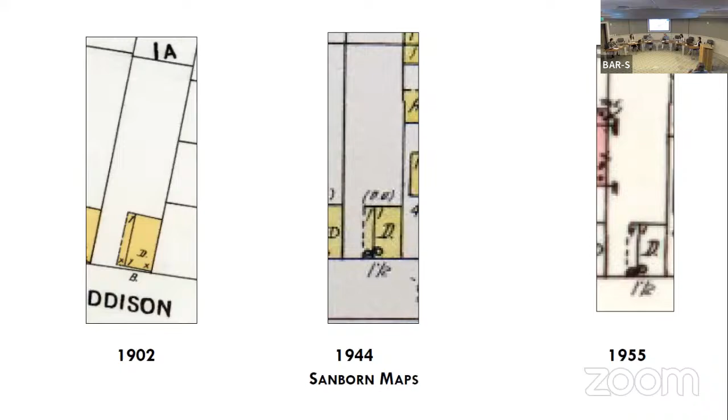They're requesting complete demolition of the existing structure. This is the property's location on Addison. Some existing site photos, and some context of Addison. And then we have the Sanborn map showing the history of the property. And I will turn it over to the applicant.

Thank you, Frankie. John Sullivan, SR Studio, representing the owner. I guess we all met out there this morning. I think this is a tough one. I don't like taking down buildings, but there's not much left there.

As the application said, it actually previously got a full demo permit in 2011 for the building, and there was a 1-story addition on 2 sides that pretty much fell down. It's been taken down since then. So the siding on those 2 sides are gone. The porch is gone, there's no historic roof. Our windows, the roof is shingles.

It's also hampered that there's a grand tree just a couple of feet off the property to the right side. So, I don't know, to save it, there's really not much for saving. There's no foundation—I think you can see there's stones and just seam blocks sitting on the ground that's holding this thing up.

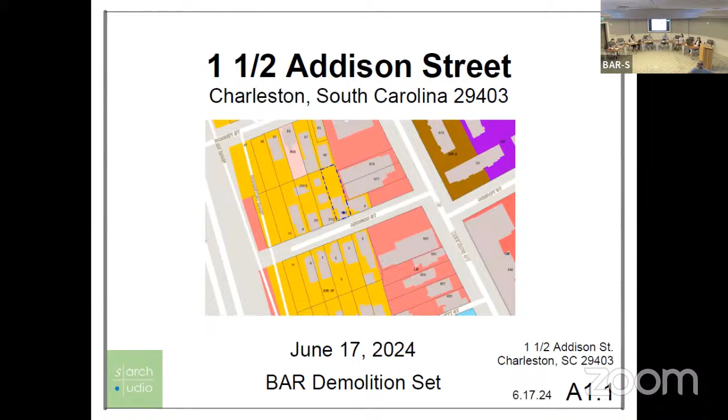Okay, that's observation. Current owner purchased in 2023 per tax records. There is a lack of permit activity on file for this property, which indicates maintenance has not been performed in over a decade. Essentially, we feel like this is a case of demolition by neglect, though as stated by the tax records, not by the current owner.

The structure previously received a demo permit in 2011. The staff have been unable to determine what sort of review was done at that time. While the structure has lost some of its original features, the essential form still exists, as well as much of the original elements underneath the vinyl siding. This is a significant Charleston building type and should be restored and repaired. So we are recommending denial.

Thank you, Frankie. Mr. Sullivan, did you want to respond to or clarify anything raised in the public comment or city staff comment? I'll respond quickly, as I said. I mean, I agree, it's a shame that the building is in this shape.

What I disagree with is, yes, it's a great form, and I would hope to retain the form, but that's not what this purview is for, it's for historic materials. There's no foundation, most of the studs are gone or spliced together and have to be repaired. It's sided on two sides, we could save the siding. But it's a zero lot line property and trying to put anything back there is bad, not to mention the tree right there.

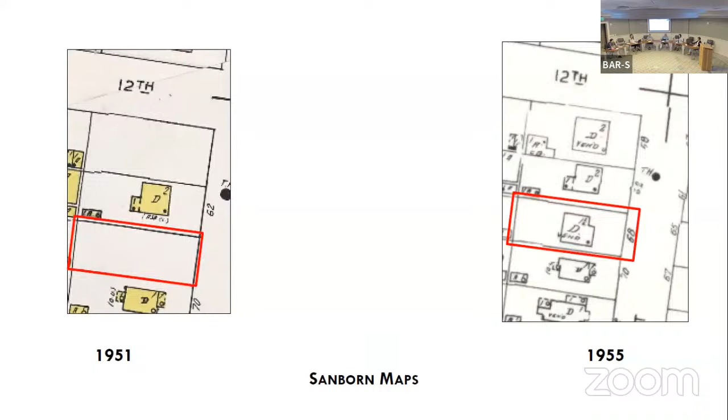And Sanborn maps showing the history of the structure. And we will turn it over to the applicant.

Hello, I'm Barbara Looney. I'm the architect of record for this application. We are requesting a removal. Can we move to the next slide?

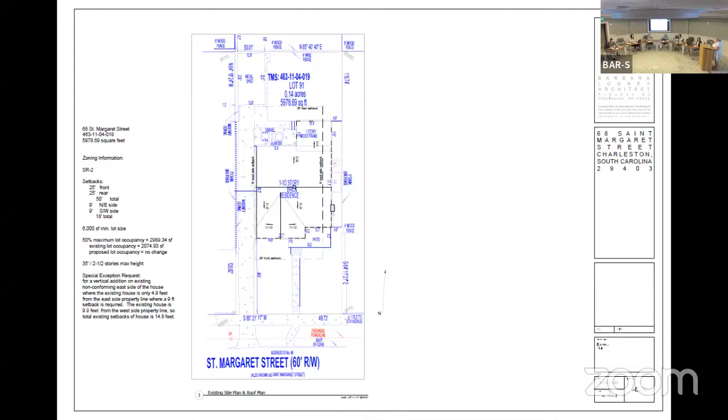If you're looking at that roof plan, that back roof, we're requesting a removal of that. You can see there's a one-story addition off the back that's non-historic. That roof would be removed as well.

But I want to point out that if you go to the next slide, on the demo plan, you can see the grayed out portion is what we're asking for the removal of. But note that we're keeping the white band around the sides of that. We're keeping the rake at either side on the gable, the original gable, and we're keeping the eave at the back.

Also the existing ridge will remain as the high point of the mass of the house. So from the front, from St. Margaret Street, the volume does not change other than you're gonna see a little bit added at the shed, but the original form will still be visible and distinguishable. So on to the next one.

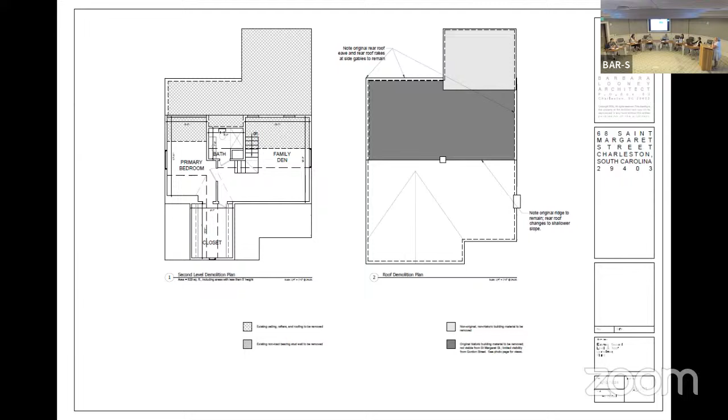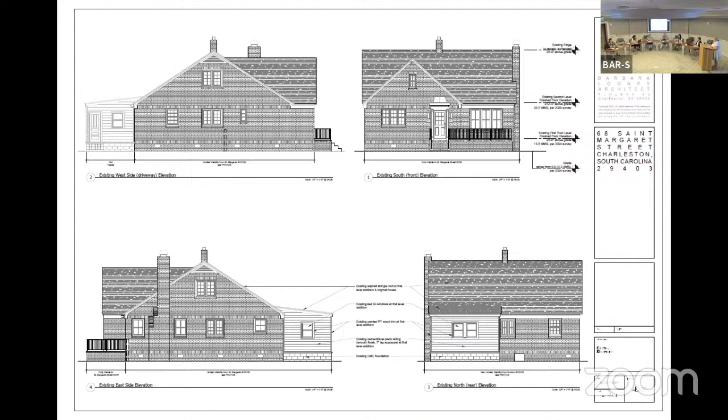There is some visibility of that asphalt shingle roof between the houses that back up to it on Gordon Street, looking down their driveways. You can see portions of the asphalt shingle roof on either side. Let's go on to the next slide, and to the next one.

That's all I had. Any questions for the applicant? Thank you. Do we have anyone speaking from the public? All right, Frankie, if you give us city staff comments and recommendations, please.

Staff observations: the rake at the side gable is being retained, and the proposed demolition is only minimally visible from Gordon Street. Staff recommendation is approval. Thank you, Frankie.

Ms. Looney, did you want to respond to or clarify anything? All right. Public comment on the applicant's presentation is now closed. We'll move into board discussion and a vote.

Just again, if an applicant wants to share what's proposed, they're not allowed to anymore, is that correct? That is correct. The applicant's proposal was reviewed and approved by BZA, so there are documents available that they are required to follow. So in that case, I believe you could have looked at those documents for the applicant to talk about. We could access them.

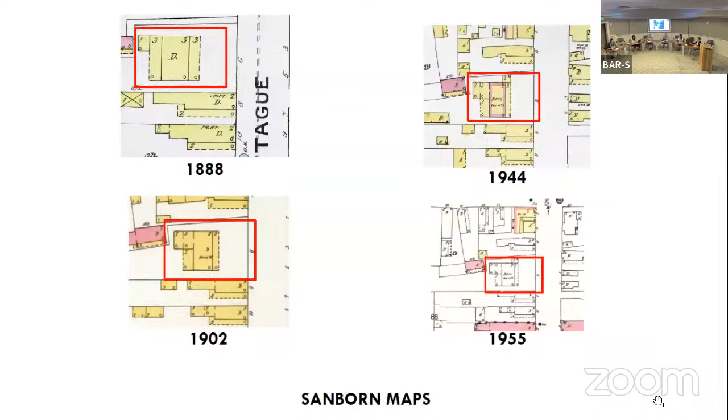This is the property's location on Montague. Existing site. That's some context of Montague, and more maps showing the history of the property, and some photos from the BAR inspection. And I will turn it over to the applicant.

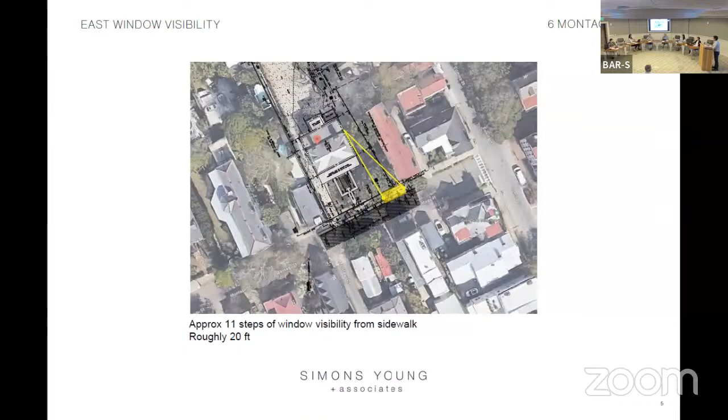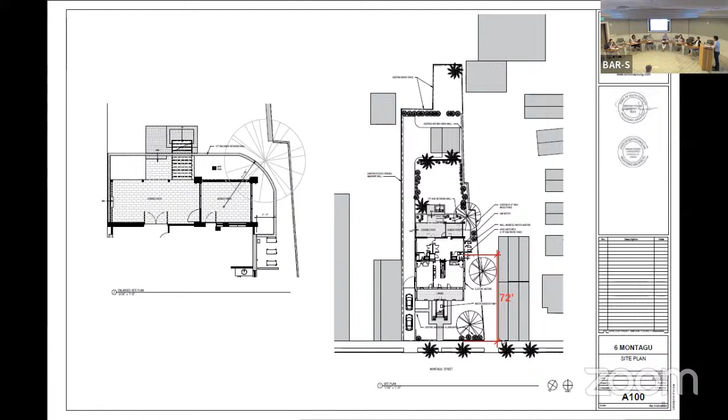We had a kitchen designer. This was part of the interior design show house for the Charleston Symphony Orchestra, and it raised over $100,000 for them, which was great. Every designer gets a room. The kitchen designer came in and altered the kitchen a bit from what we have, and the range moved over, so the operable window was no longer a good place for it.

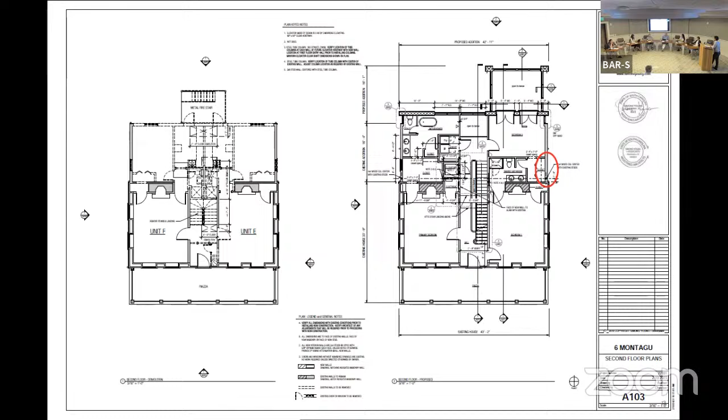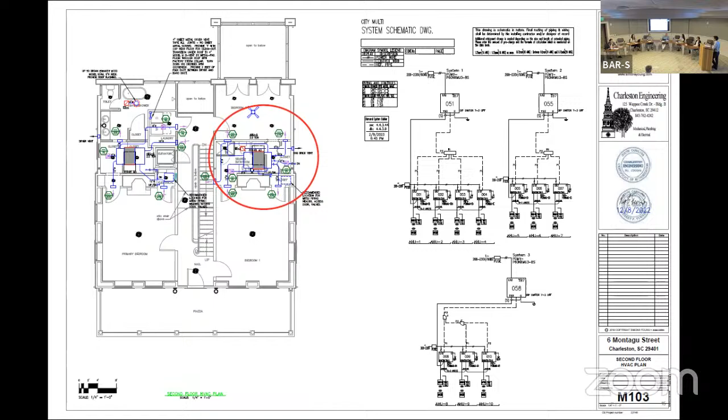And then this is the mechanical equipment that's squeezed into that little section. We hired a mechanical engineer because we were trying to do a lot in a little space and keep it happy in 100-degree weather, which we accomplished. Next slide, please. And then these are the hot water heaters, which are in the same location they used to be in. There are now 3 instead of the 6 that were there.

Is there one more slide? So that's the building that sat on the market for a little bit, on the left-hand side, in 2021 I think. I probably rode by it a lot of times and just kind of wondered, what's up with that building? It doesn't quite look right. And so the owner restored it beautifully, and that's the picture on the right. So we feel that this window is in a minimally visible part of the structure, which is not historic, and we would respectfully request that you approve the relocation of this window.

Thank you. Any questions for the applicant?

Maybe if you don't mind, just a quick rundown of the timeline from your perspective, like how the decision was made and what happened and how we're here. Sure. So the entire construction of this project happened within the course of -- felt like 2 months, but it was 12 months, which was a lot. This was a very fast-paced project.

The owner had a contributing contractor, and there was a contractor on site. The contributing contractor, at the suggestion of this board, which was a good one, removed every piece of wood on the 1960s addition, because some of it had been relocated from the north side in a smart way, sanded it, and then put it back up. So there were 2 contractors, 9 designers, me, and the owner, who was incredibly involved. He lives across the street, he's been there 40, 45 years.

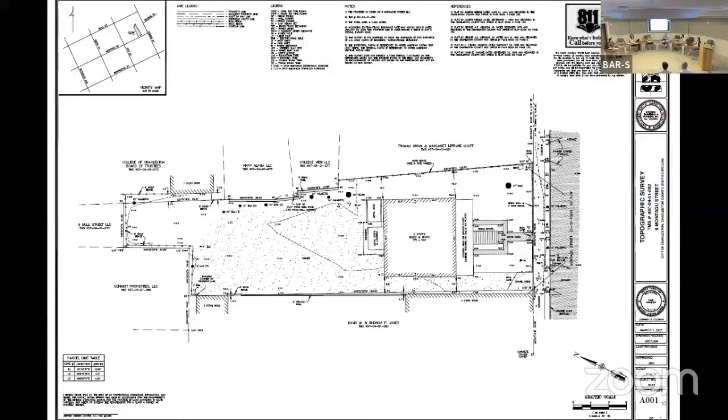The staff recommendation was based on the approved drawing. Our option was that either the window could be where the board approved for it to be, or it could match the size and placement of the window on the west elevation. Since that was a position and size that the board had approved, we felt that we could offer that at staff level. On the west elevation, it is a smaller window where the windowsill matches the front portion of the house, so we were mimicking that in part, trying to provide an option.

I understand you guys have to make those judgment calls about your purview and every individual case, but with this being on a relatively non-historic part of the structure, I can't imagine there would have been any controversy.

I think small changes come about in every single project, and in my personal estimation, this is one of those small changes that doesn't really alter the design in any substantial way, and I really don't have an issue with it.

I agree, Julia. I would say hopefully somebody gives that interior designer a pretty stern talking to, coming and moving things around that are approved. Hopefully that would be an end result of all of this, whoever that was.

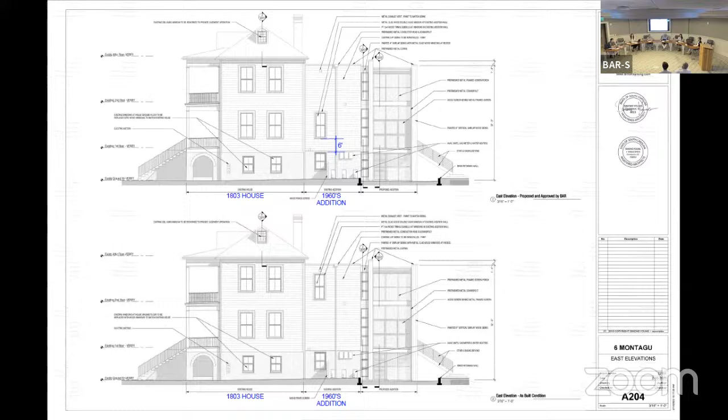Agenda item, 82 Columbus Street. Frank, could you give us some introduction and overview of the project, please.

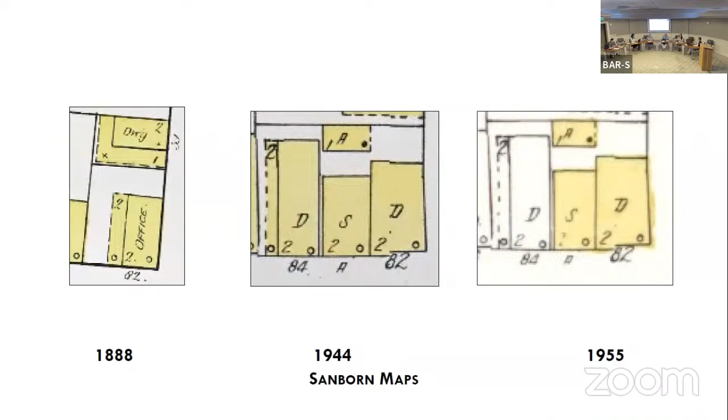82 Columbus Street is on the East Side, Council District 4. It is not surveyed, circa 1991, in the Old City District. Requesting conceptual approval for alterations to the existing exterior stair. This is the location on Columbus Street, some existing site photos, context of Columbus, and a Sanborn map showing the previous structure. I will turn it over to the applicant.

Good evening, ladies and gentlemen. My name is Nicholas Ranko and I'm representing the homeowner. I am with Duke Commercial Construction, we also do residential, but today I'm just requesting your approval for deleting the existing staircase to the front of the house, which is on Columbus. This house sits at Columbus and Hanover.

I know this isn't required, but this is just my synopsis on the property. The house was constructed in the early 90s, it's a 2-story, and I believe it's zoned commercial use.

Currently it is sitting behind that screening right there, which we're going to leave in place, and we are just looking for access to the second floor. We're utilizing this side entrance as a dual purpose, so you can have access to the first floor. And then if you dogleg right up, which is on the prints, you'd have dedicated access to the second floor.

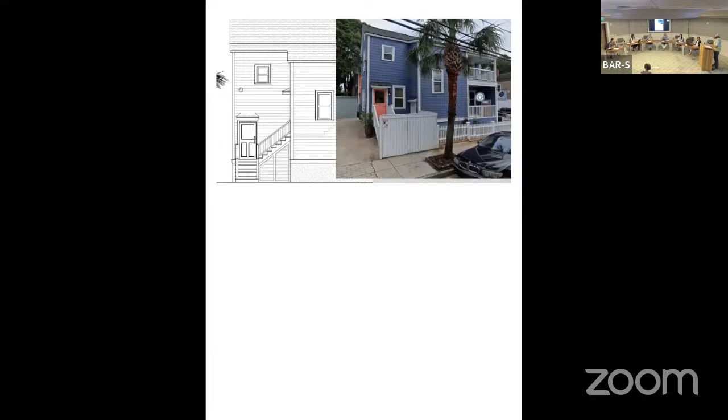Let me know when you want me to stop. Thank you. Right there.

Next, the one previous please. You can see right there on our demo plan, the hatched out upper left is existing staircase, and on the right-hand side we have our proposed staircase. We would be adding a door to the second floor. We'll try to match the existing finishes and profiles. And I believe that's all I have.

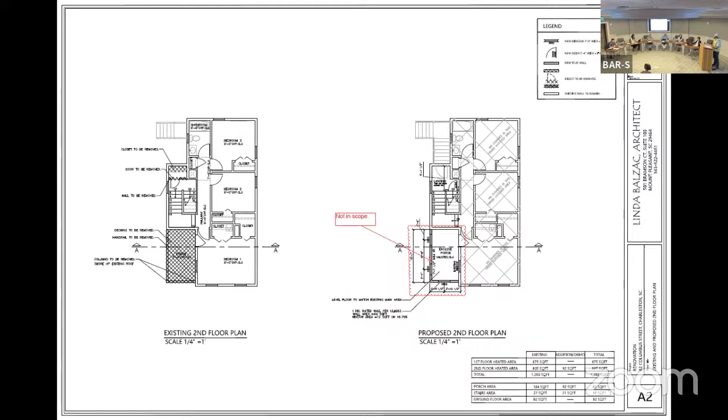Any questions for the applicant? So the goal is to be able to access the first floor as commercial and the upper separately as residential, right? Just to segregate the two.

It would be, so I currently have a hair salon downstairs. The upstairs right now, I would like a separate entrance so that people are not coming in and out of my business, so I could then lease it out to another business. There's an attorney currently across the street from me. The street has really come along with a lot of businesses, and so I would like to have another professional person in the building upstairs from me. So no one will be living there. It would be rented to someone professional so that otherwise half the house is sitting empty. It doesn't make sense to have a commercial building that half of it is sitting empty, and there's just not enough. I just need another entrance so they can have their own come and go without coming through my space every day and interrupting my business.

We do have neighbor support as well. We got it in after I submitted our submittal. We did have some support from the across the street neighbor as well.

Any other questions? So there is a first floor door that's being removed, or is it tucked up under that stair? There's a first floor door under the stair, is it staying? I'm looking at the picture, which door? If you go back to the photos, the one that's just around the corner right there. Oh yeah, that's a little storage shed that's staying. That was the existing storage part of the house. So that's tucked up under the stair is proposed, and that'll stay.

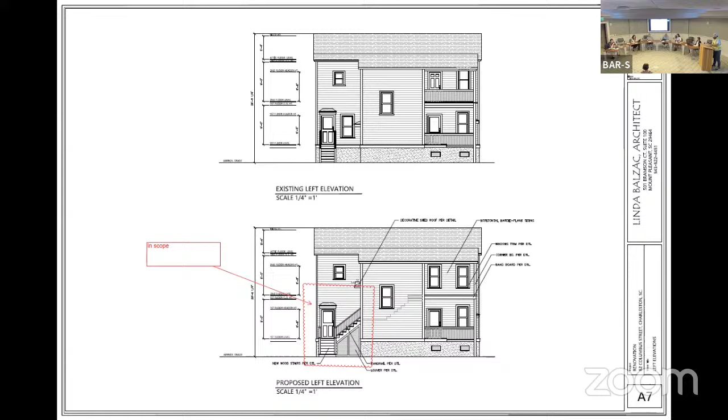Any other questions? Thank you all. Thank you. Do we have anyone speaking from the public? All right, Frank.

Staff just had some observations. The provided drawings show some porch infill, but that's not noted as part of the application, so we were assuming that's not part of this. We had a condition that the drawing should not show that, as it is being reviewed because that would also require board approval. Staff recommendation is conceptual approval for alteration to existing exterior stair with staff condition and final review by staff.

Thank you, Frankie. Did you all want to clarify or respond to anything in the city staff comments? You don't have to. They gave you a good recommendation, but you have the opportunity to respond if you would like, before we move into board discussion. All right, public comment and the applicant's presentation is now closed. We'll move into board discussion and a vote.

You could definitely, as you described, enhance functionality in the building, which is a good thing. I guess the only thing I would ask is that you have your architect properly render the enclosure under the stair—right now it just looks like fixed louvers. If you can render whatever door apparatus you're coming up with when you submit to staff for the final sign off.

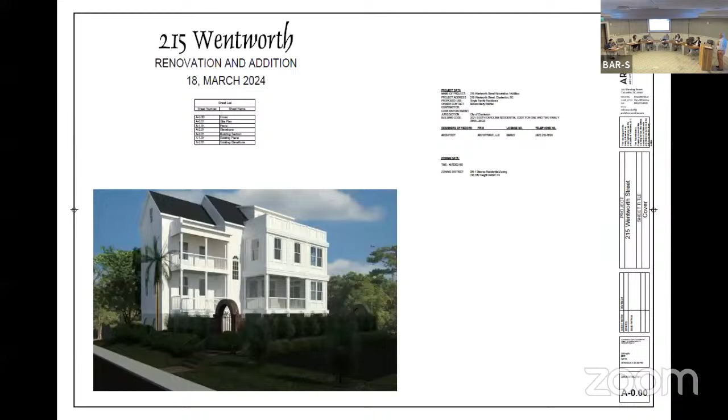Any questions for the applicant? How much higher is the plate height? I'll just say you're proposing gables versus hip on the front. How much higher is the plate height you're proposing? Let me put my glasses on. Existing to proposed, yeah.

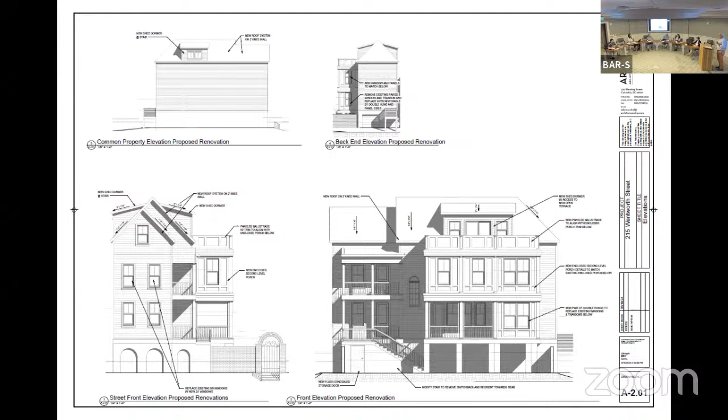There's a short knee wall. There's probably a section in there, Frankie, that shows it where that gable comes up. There it is. 2 foot 4 inches, 2 foot 6 inches.

We actually did receive approval from BZA for a special exception since the existing porch and part of the house was actually over that side setback. Any other questions?

Thank you, Mr. Marshall. Sure, absolutely. Do we have anyone speaking?

Anna Catherine Alexander with the Preservation Society of Charleston. We would like to thank the applicant for meeting with us to discuss this project earlier this year. While we understand this building is not historic, it does have a height, scale, and massing that's largely in keeping with the character of the historic district. The age of the structure does allow room for flexibility to explore creative design solutions, but as proposed, the approach to gaining additional square footage is aggressive and needs to be scaled back. In particular, the alterations to the roof form and the series of side additions and dormers result in a design that is complicated, top-heavy, and out of scale with the streetscape and the surrounding context. We feel that this design needs further study before it can move forward. Thank you.

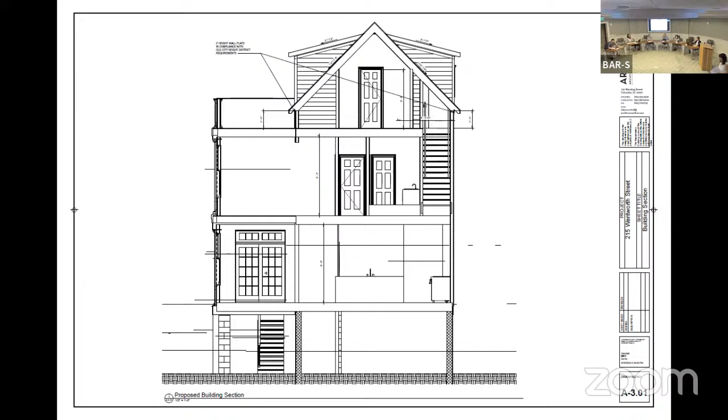Frankie, if you'll give us city staff comments and recommendations. Okay, staff just had a couple observations: that the expansion of the gable roof form substantially alters the form of the house, and the proposal alters the height, scale, and mass of the existing structure. In addition, it contradicts typical development patterns by having infill above an open porch. Staff recommendation is denial for height, scale, mass.

Thank you, Frankie. Mr. Marshall, did you want to respond to or clarify anything raised in the public comment or the city staff comments and recommendations? Yeah, I'm a little bit...

Disappointed with staff's bluntness in their reply. I actually reached out to Frankie a couple of times by phone and email, came down here with drawings 50 days ago, and I recognize staff's really busy. I haven't really heard a reply after trying to make numerous efforts to come down here. I was under the impression that my boss was responding to you, so if that did not happen, I apologize because I thought that was the case. Not one response from anybody.

I think if I had known that was happening, I would have tried to address something before. We met with the nice ladies here back in January, and at that time we were not changing the very front room of the house roof, and it really looked like, to us and to me, like somebody stepped on it. So I think the introduction of the gable there was actually helpful versus the existing structure, which is part hip, part shed, and very flat compared to other houses in the neighborhood. I felt by raising that gable up at the street, it actually made it more sympathetic to the neighboring houses around.

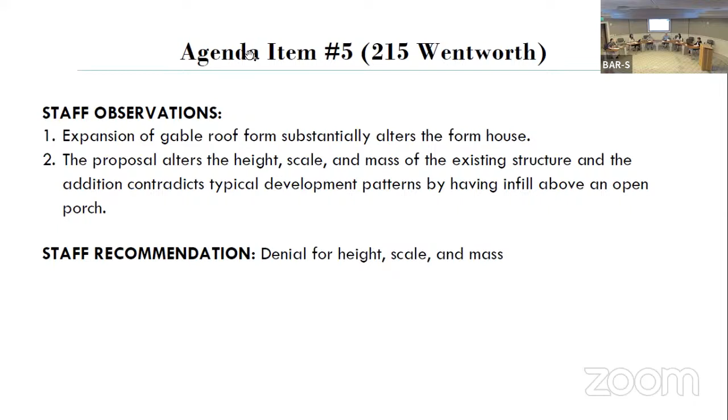Probably a pretty nice view up there, right? Sorry, probably a pretty nice view from up there, admittedly. Right, do I have a motion to adjourn? Yeah, so moved. All in favor? Aye. None opposed? Motion passes. Thank you all.